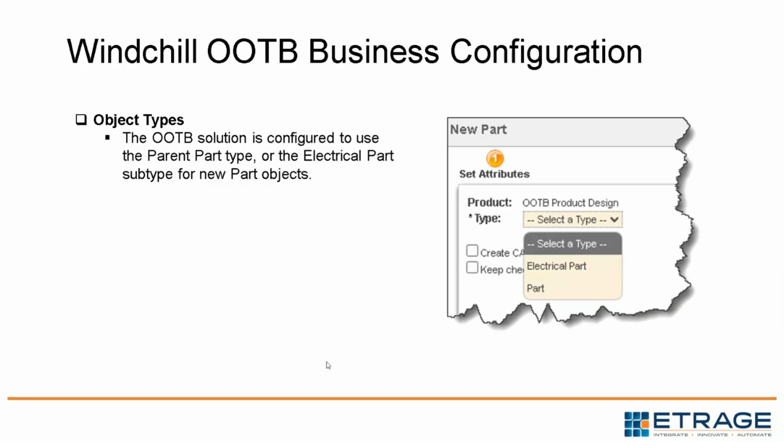WT parts configuration, same thing, coming from the site. It's out of the box functional. You get two types out of the box, electrical and part. Electrical is a subtype of the part, strictly therefore electrical parts. And of course, you get the part, which is the parent. That's what you get when you create your CAD or a standalone part and make association - you get that part, which is the parent. Not recommended, again, for the reasons I talked about previously.

On the other hand, when you try to create a document, you get a long list of these documents. I'm not sure you get them all because I installed Project Link. It might be you only get the document and the reference document, and the rest of it is not there. But if you install Project Link, then it creates all these subtypes for you. The document is the parent, and then reference document and the rest are all subtypes.

Again, I mean, that's generic document. Typically, customers would like to specify specific document types with titles that users would like to use.

Moving on to context creator. So the out-of-the-box setup is nobody can create. When you install Windchill with just the WC admin, nobody can actually create lower level context. The lower level contexts are really the area where end users interact with. If you're not an org admin or site admin and you log into Windchill and there are no lower level context - products and libraries mainly - then there's not much you could do in Windchill. There's nothing you could do really, because then you can't create anything, you can't store anything. So the first thing you need to do is make sure that

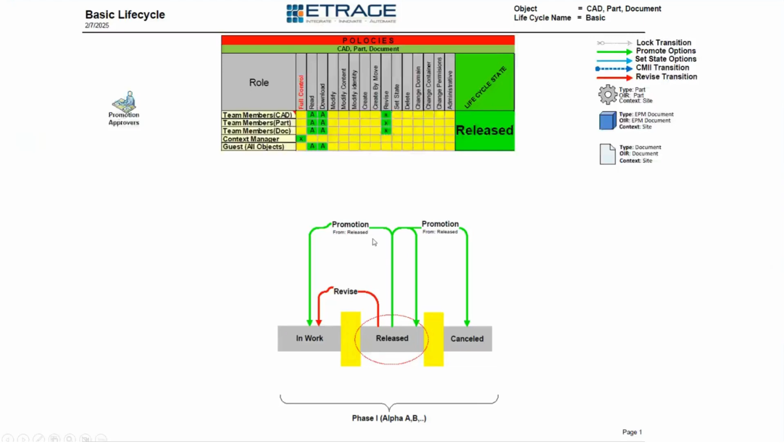Let's see. I missed a state here. One sec. My apologies, one second. Okay, I wanted to start here with the in-work. You guys still see my screen? I hope so. Okay, yes, we do.

Thank you. The in-work state — this is mandated. Every object we already listed, parts, documents, CAD documents, and regular documents, they have to go into that state. There has to be a record of that in-work state for all these objects. And here are the policies: team members, meaning anybody assigned, with the exception of guest. So if you put a new role to that team or put somebody as a member, these policies apply to that particular user or group of users.

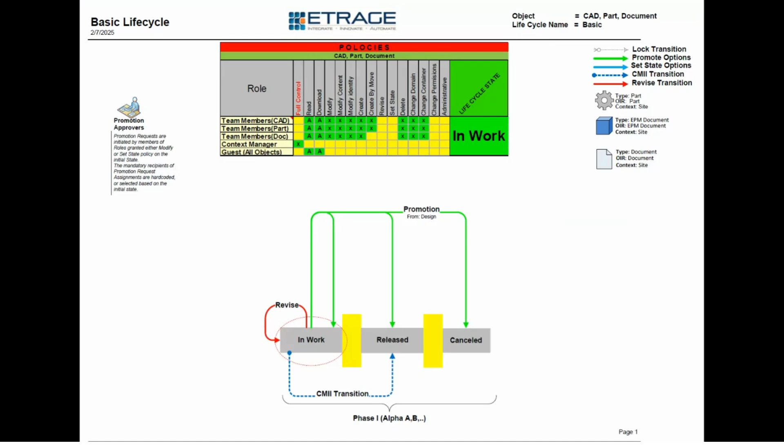You can see the obvious alarming permission is the delete, right? So the ability then you can go create and modify and so on. Some of this stuff is also a little confusing, like some of it has change management transitions, but isn't necessarily set up to take on change management. It is not suitable for a production environment. It's meant to just get you started on learning how Windchill really manages files, but you're going to quickly realize this is going to create a lot of discrepancies internally.

So let me go to the released one. In the released state, you would notice that everybody has the ability to revise back to in-work. We didn't talk about promotions, but you saw there's promotions from in-work to released. Let me go back, just to identify. And you can promote to released or canceled.

If we go to released, you see it can revise, and anybody can do this. It's not restricted. You could be an engineer, a document, a marketing person — it doesn't matter. Those policies apply to you because they have been written for one role and one role only, which is the team members, and that means everybody but guest.

And here's the cancel state. Again, there's change management from cancel to release, which doesn't make sense at all. But you could revise to in-work. So potentially, if I have a change object in cancel, I have to revise it back to in-work, which is fine. But why would you have an automatic transition from cancel directly to release? That doesn't make sense, but that's what the setup looks like.

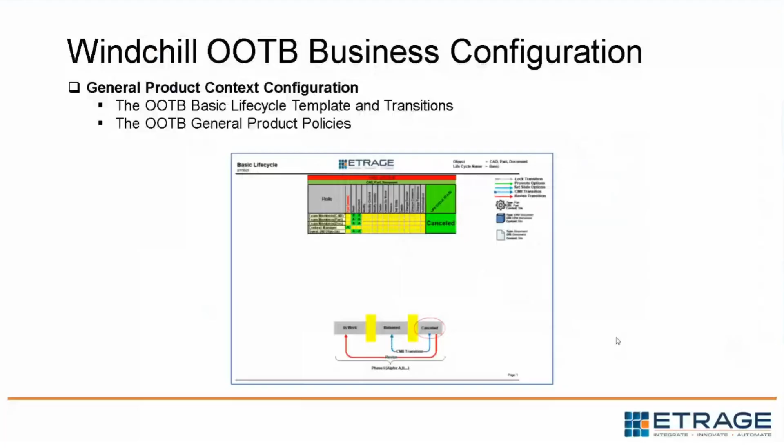Now we're going to talk about the other template that you get out of the box, which is the product design. That one is a little bit more sophisticated, and from the start you get a team more oriented toward the production environment, where you don't see just members. You see terminology that might be utilized in a company, like designer, engineer, marketing, procurement, manufacturing engineer, team leader, things that might be reflective of some job title that a company uses. And here's the list.

There's quality engineer, there's procurement, as I mentioned. And as we move forward, you're going to see they've taken it a step further. So in contrast to the template that we used previously, which is the generic one, the general one, they were very sloppy. They just created policies for team members that applied to anybody. For the product design, they actually did specific policies.

But before we talk about that, they also included OIRs, object initialization rules, that when you use that template, come embedded in that particular product. So now for promotion request, part, EPM document, and regular document, you're no longer utilizing the OIR from the site. Now it is restricted to that environment, which means if I make changes to it, I can. And if we do upgrades, whatever the upgrade does to the top level, none of this will get affected.

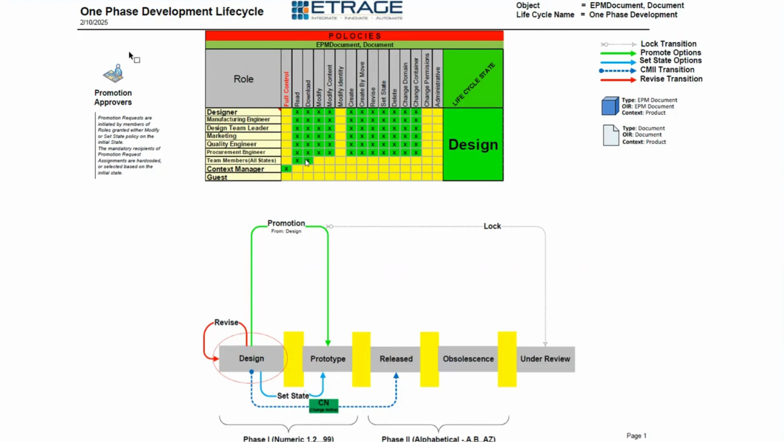I don't understand why marketing would have to have the ability to revise. It doesn't make any sense. For document maybe, but not for CAD and WTPart. So again, not a lot of thought was put into it, in my humble opinion.

Moving on to the prototype. So you're in prototype and you revise in prototype. I don't understand that. Why would that be the case? Okay, so prototype did not work out, and I revise in prototype? No, I would revise back to design. So I make changes, prototype it again.

If it's in prototype and revise in prototype, then the policies have to allow me to actually make changes, which you see the out-of-the-box policies are. Well, great, then I could send something out for prototyping and keep modifying it on the same version. Well, that's confusing. Now, what version did we send out for prototype? Oh yeah, I totally disagree with that.

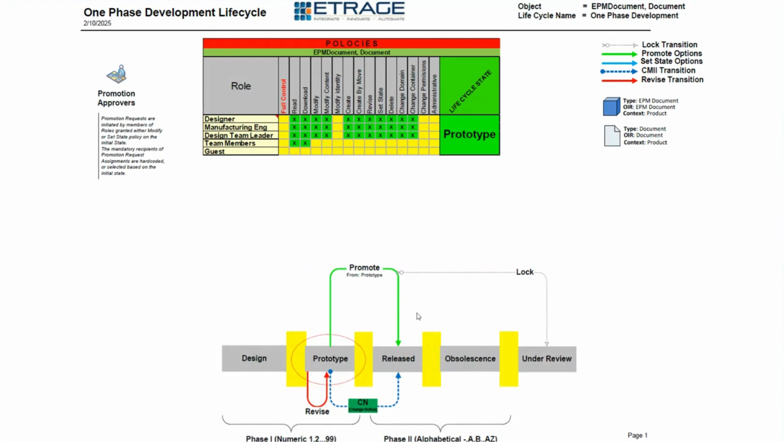Moving on to the released. I've never seen that. You release and you go back to prototype. No, that terminology is very confusing. Design, prototype, that's phase one. Release is release. We release the product. Now we have to do change notices.

So we're really in the phase of production change, release change, something that is more of a critical, if you like, title or something that intrigues the engineer to know you're not prototyping anymore, you're in production change. So everything is on the table.

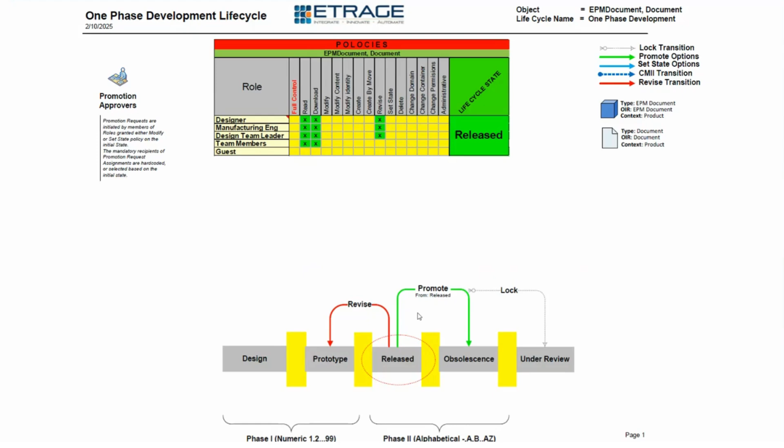I tend to warn customers about granting download for designers and engineers. Maybe a team leader, somebody at that level. And the feedback I always get is, well, we would like to see what that obsolete object looked like. And I always tell them, why don't you open it in Creo View and look at the published file, which you should be able to do with just the read permission. And they say, no, we want to open it in Creo. Well, technically, you can't do that until you have the download permission.

So it's a common struggle I have, but really all I can do is warn the end users and the customers: you might end up with a discrepancy where your end users eventually assemble something that's obsolete. Because in Windchill you're not making changes to the obsolete file, but you're putting it in the workspace, and as far as Creo is concerned, it's reading it, no problem. So you can bring it in, assemble it, and check in the assembly. You haven't made any changes because the policies won't let you, but that doesn't mean you can't assemble it and update the assembly.

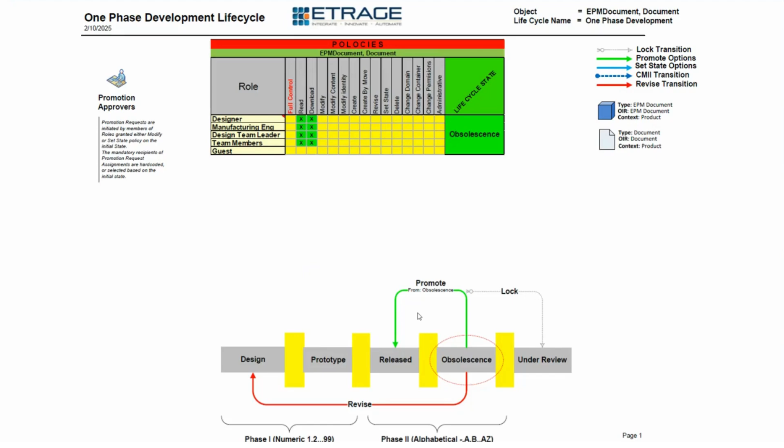The under review state is meant to complement the promotion request and the change management processes. Anytime an object goes through a promotion request, meaning we're officially changing its state from one state to the next through a process, anytime we send a task for approvers to review the data so they can vote whether to rework it, reject it, or approve it, these objects are automatically set to the under review state. Okay?

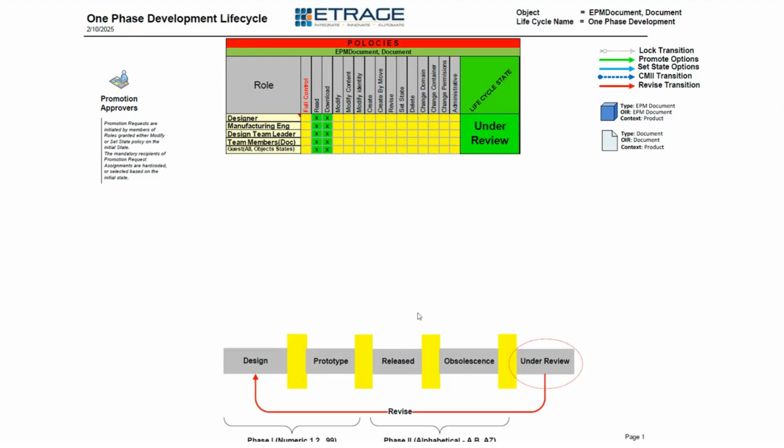The issue is that they identified that somebody can revise the object if it's under review, but they block that in the policy, which is a good thing, trust me, because no user should go into an object that's under review, going through a promotion request or a change management object, and revise it. That will create a bunch of headaches for the approvers. They're going to look at the object and say, I'm not reviewing the latest. What's going on here? So that needs to be addressed. Luckily, none of the out-of-the-box roles that come with this template have the permission to do that revision. But it is actually enabled in the lifecycle. All right.

Product design context, about two-phase. Now we're going to get into the two-phase. This one is a little bit better, right? And remember, this one applies to only WT parts, not CAD and documents. And by the way, all these policies have been written at the lower level, at the product level. So they're not inherited from the org or the site.

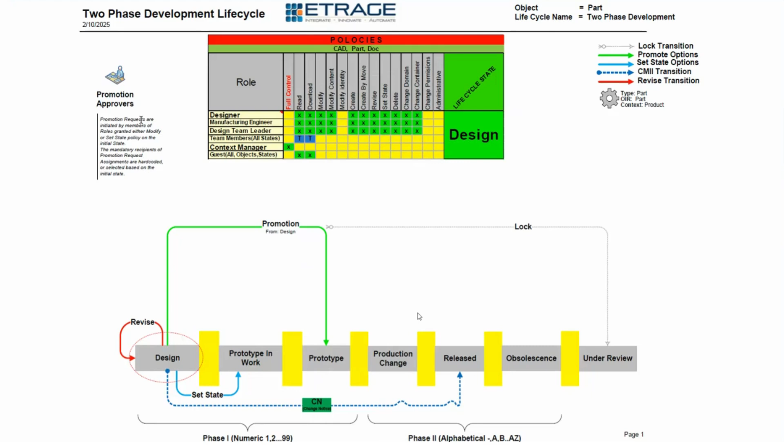And now you can see that this makes more sense. Now we have something called the prototype in work, which makes sense now. If I send something to prototype and an issue comes back, I can kick it back to prototype in work so I can make changes to it. But in the design state, it's the same stuff we've seen earlier. But here's the prototype in work.

What doesn't make sense is, why am I allowed to revise in the prototype in work? To get to the prototype in work, I should have already revised from prototype, which is there, which is fantastic. But why am I allowed to revise here? Well, to get here, it's a new revision from prototype anyway. Why do I need to create a new revision again? And again, the bad part is that the policies allow all these roles to do that. So you need to be aware of it.

And in prototype in work, there's a change management to go to released. I disagree with that. I don't think that should be the case. There should be a change management from prototype to released, not directly from prototype in work. That would be really confusing. We had a prototype that didn't work, and now we're making changes to it. Oh, we're going to skip prototyping again. We're going to just release it. Well, that doesn't make any sense.

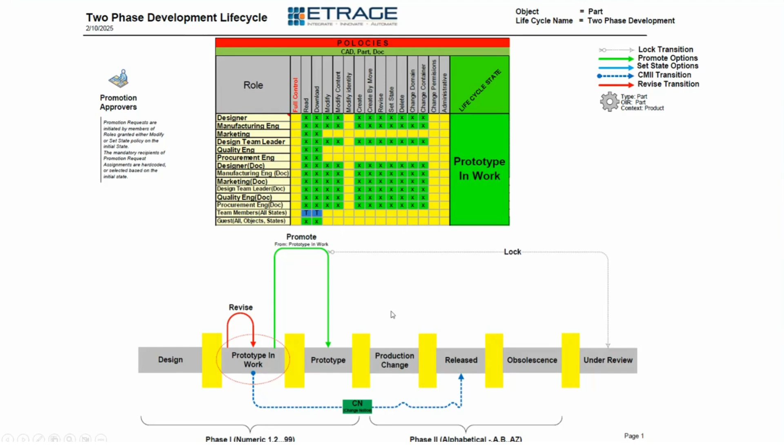Prototype, this makes sense, right? So now we can promote to release, or we go through an ECN and release it. And if there's an issue, we could revise it back to prototype in work. So I have really no objection to this layout here. They nailed it on that one.

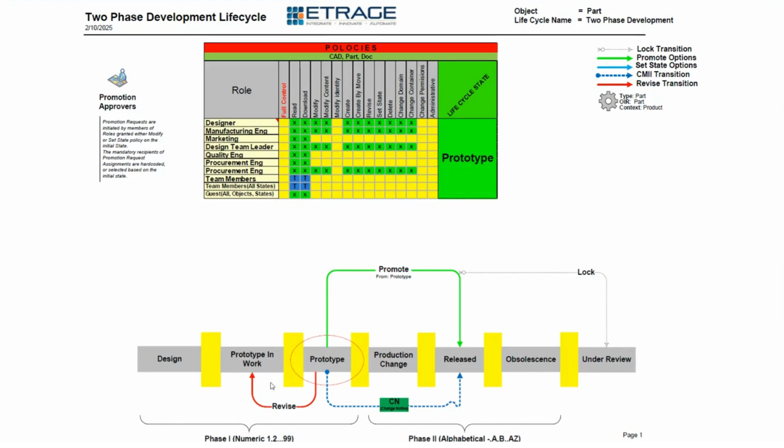Production change, that doesn't make sense. So to get to production change, you revise from released, same issue. Why am I having to revise again, or have the option to, to get to production change? The object was released, so it got back to production change. So now I need to work on it. Why am I granted revise again for all these roles? So again, that would create problems.

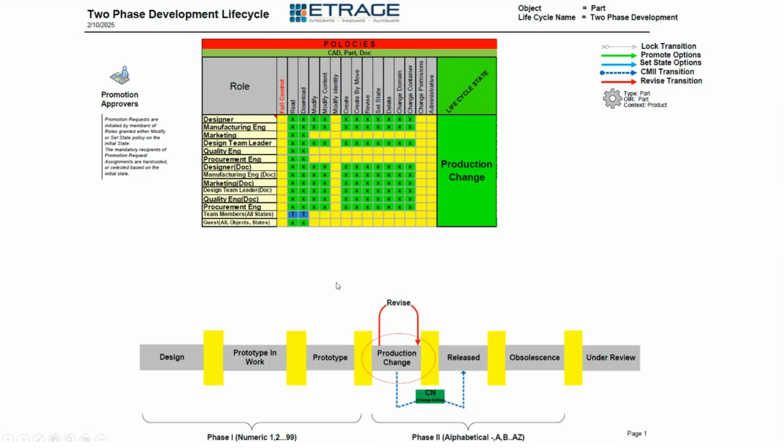And typically, when you're in production change, your ECN shouldn't automatically jump you to the released state. That is not desirable, because typically the objects, when they're in production change and as they're going through approvals, would be under review. So they did not really configure this correctly. This one, okay, I kind of agree with it. I typically shy away from using promotion requests when we're in the production phase. I rely on the CM2 process and CM2 objects.

Under review, again, same issue as before. No need to revise, but luckily they nailed the policies where it prevents users from doing that. But what is alarming here is that there is no change management transition from under review back to released. Because when objects are going through an approval, they're going to be set at under review. Not out of the box, but that's something we highly recommend.

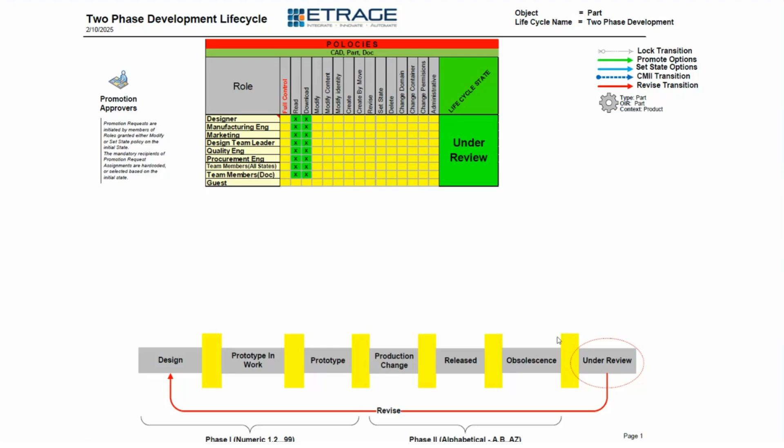Okay, they're under review. They're going to remain under review until the change notice is complete. All right? Well, if that happens, how is the system going to know how to release them? It's not going to know. And then you're going to get conflicts, and the ECN will not complete successfully.

All right, moving on. So we're done with these configurations and the different life cycles, and now we're going to jump onto the out-of-the-box processes. And keep in mind that these are enforced directly from the site, mainly promotion requests. The promotion request, if you're not familiar with it or you never heard of it, is probably one of the most versatile, well-proven, stable, highly customizable objects in Windchill.

And what it does, it allows you to formally request a review process on multiple objects of any type. So it could be a combination of documents, WT parts, and CAD objects. Put them all into one promotion request, send them out so they can be reviewed, and then there are loops in there, where if the approvers decide they want to send it back to the creator for modification, there's track of it. It automatically associates itself in the history of all the objects that were included in the promotion request.

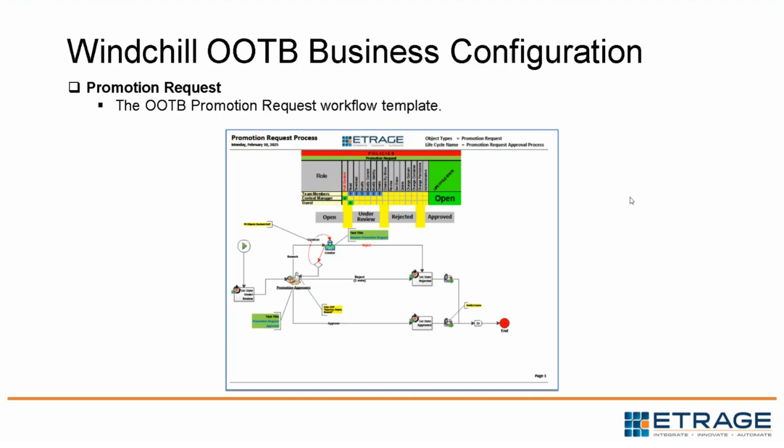And the biggest one that we always get from customers: please implement something so the creator does not select himself or herself as the approver. That's unfortunately not out of the box, but that's something we also can implement, or you should think about before you release it.

The next topic is the change management objects. Out of the box, all these are functional. You can create all of these, no problem. If you're not familiar with the objects that represent the change management process, here they are: problem reports, change requests, change notices, and change notices will have an implementation plan, which is a list of change tasks. And then you could use variances and the subtypes, you could do deviations or waivers. So that's all available out of the box. Again, these objects are parent objects, and they're coming from the site. Okay.

Out of the box, the flow of this change management process is you start with the problem report. You take that problem report or a combination of them and create a change request. And then you can take that change request or a combination of them, that's your choice, and proceed to create a change notice. Additionally, out of the box, you could skip problem reports. You could start with a change request and proceed to create a change notice. This one is not out of the box: out of the box, you're mandated to create a change request before you create a change notice. But with a preference, you may skip change request and directly go to change notice.

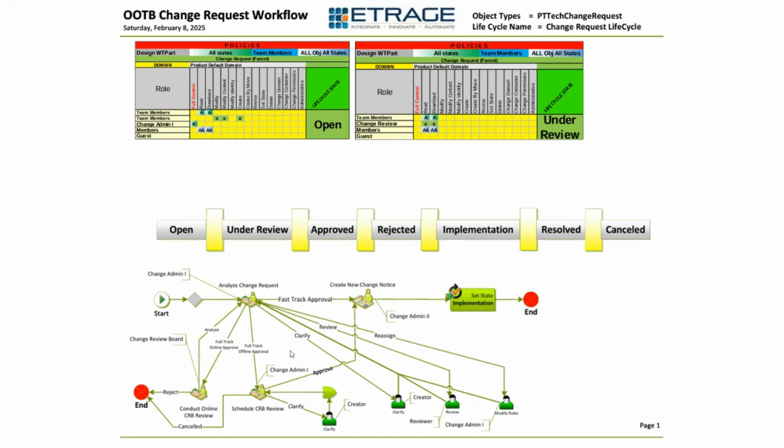The out-of-the-box change notice workflow - so now that we have a change request completed, change admin 2 would receive a task once change admin 1 completes that CR. Part of that CR workflow sends a task to the assignee of change admin 2, and that person in turn will have to come in and create the change notice. The good thing is that task sent to change admin 2 cannot be completed by that recipient until the change notice has been created, and it has to reference the CR that change admin 1 created.

So that's a very, very valuable function that's embedded now in Windchill, which I'm all for. So once I send somebody a task to proceed to create an ECN, they're not forgetful about completing the task without actually initiating that CN. So now Windchill mandates that you do that before you can complete the task.

The change notice is, again, you go in there and you develop what we call the implementation plan, and that would be those suitcase objects we call change tasks. There's only one template of these right now, as I explained earlier, and I'll point it out in a minute.

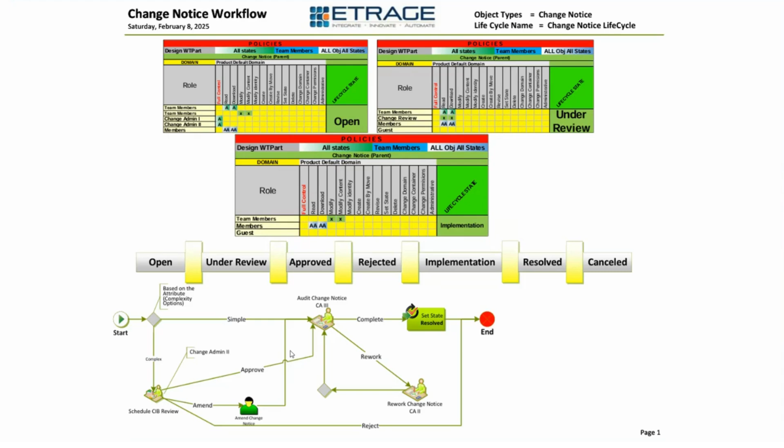Once the plan is executed, the out-of-the-box functionality does not allow you to sequence the tasks. So you might have multiple tasks, maybe 2-3 tasks to update CAD, and then you want to jump on to update documentation. Well, it would make sense to complete the CAD first, then do the documentation afterward, because your document authors might want to reference the CAD to make sure they have the latest illustrated in their documents. So you can't do that out of the box, unfortunately, and that's something a lot of customers find very valuable.

The change tasks, those are the suitcases we call implementation plan. Those are the objects I was just talking about, where you should be able to sequence them, and each one of these objects would contain the new revision of the specific objects to be modified by a selective user, and potentially approved by a selective approver.

The process is that it's sent to that assignee, and then the assignee would submit it to a reviewer. The reviewer will send it back for rework if necessary. During that process, the system, unfortunately, out of the box, it doesn't do it. But that's something we highly recommend, that the objects being worked on and being reviewed should automatically transition states, so there's no confusion.

When the reviewer gets them, they should be under review. When they're sent back for rework, they should say production under change, or whatever terminology you want to use. And the reason you want to do that is because you don't want the reviewer to be looking at files that are in a state where the assignee can or has the permission to continue updating them, because that doesn't make any sense.

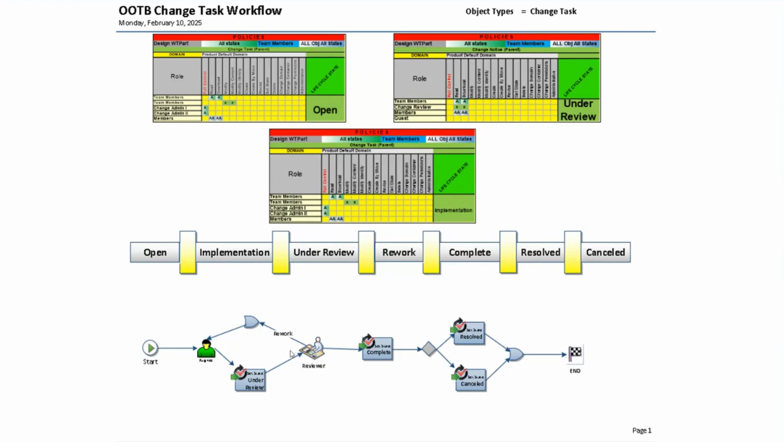Yeah, that's basic PLM. You definitely need to have that implemented. That's about it. I hope I didn't bore you all, but I can take any questions you may have.